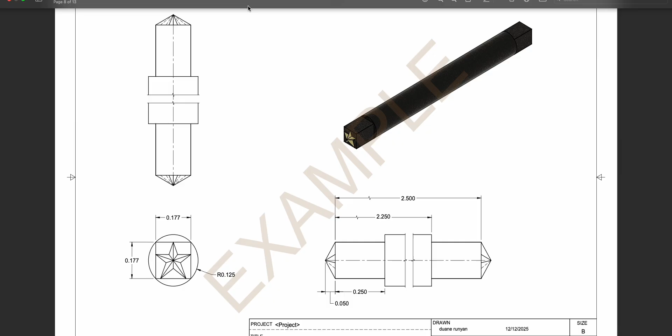All right, so I'll go ahead and drop out of this view and open up our fresh document for Fusion. Just like before, we're going to make sure this is in our folder. As you can see, we've done all these parts so far. And we're just going to now create the sketch from the front view.

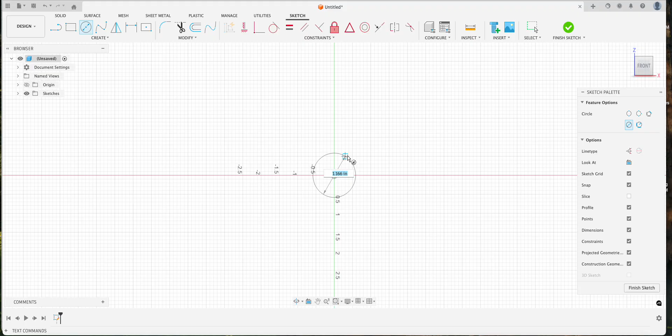And we'll start with the diameter of 0.25. I know that's really tiny, we'll make it bigger so you can see it. Go ahead and finish the sketch. Click on home view so we can see it work. Do extrude to 1 inch.

Okay, now we need to draw a box from this face. So we'll go ahead and do create sketch. Be sure to choose this edge or this face, not the axis. Do you see based on the shading where that is? We just need to make sure that we click over here on the circle, not on this square.

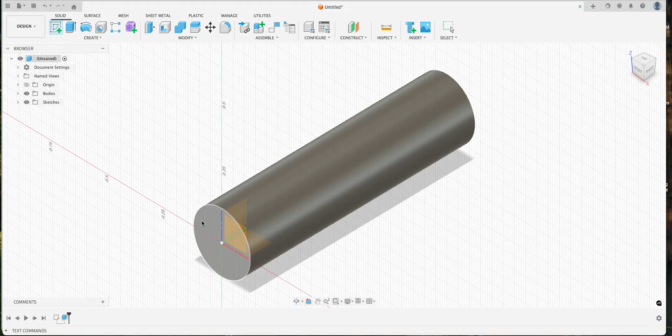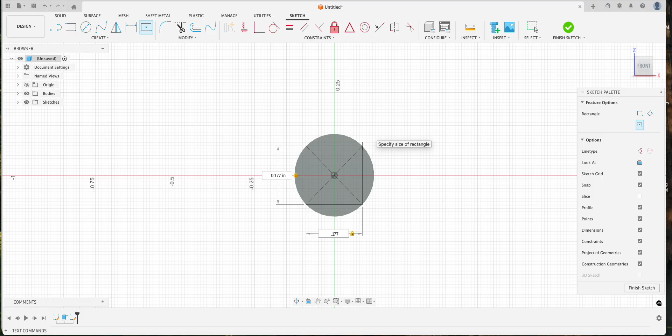Excellent. Now you may not have the center rectangle showing on your menu, so if you click on the menu title, create, come to rectangle, choose center rectangle. Then we'll click on the middle here and just move the mouse. I'm not dragging it, this is just moving it in the right direction. And then we'll type in the keyboard 0.177 in both fields. So we use tab to move to the next field, 0.177. You won't be able to just drag and get it exactly right, so you've got to type these in.

All right, now we'll go ahead and finish this sketch and we'll extrude this square out a 1/4 inch, that's 0.25.

All right, now we're going to put the star on the face here. Just a word about the star real quick. I have a 5-pointed star, that's the one I'll show you how to do. You are welcome to do something larger, or like a 6-pointed star. That would actually be a smoother star if the train was rolling down the track. It's your choice, you do need to do some feature that's extruded on this piece though.

All right, here we go. We'll go ahead and do the create sketch. We're going to use this face right here.

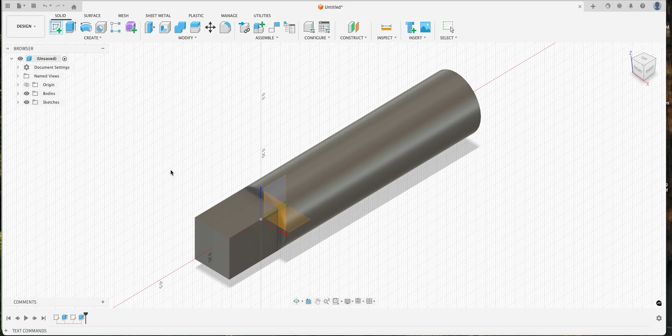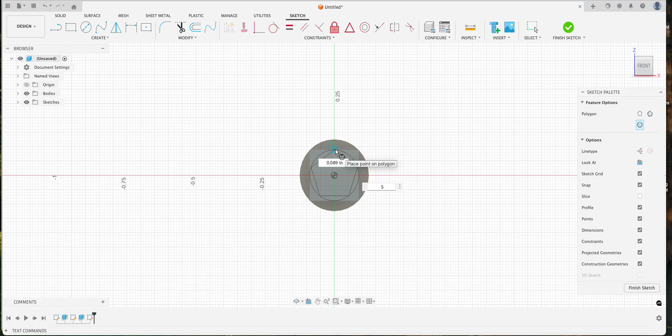Okay, and under create, there's one that's called polygon. Use the one that says inscribed polygon. This means that it will be inside of a circle. So we choose the center origin here like this, and you notice that right now it's a 6-pointed star. If we wanted to, we could just go up here and just make sure that all points of the star are inside of the box. But I want to do a 5-pointed, so I push tab, choose 5, and then I'm going to adjust this so that it fills the box the best I can without it going outside of the square. It looks like the top will be just fine.

Okay, now let's zoom in a little bit, and using the line tool, remember we can push L on the keyboard, and we're going to draw lines from each vertex into the center, and we'll also draw to each point, so each point should have 3 lines coming to it. Let's see, that one didn't work. Let's do, oh yes, this one here. So each point should have 3 coming to it.

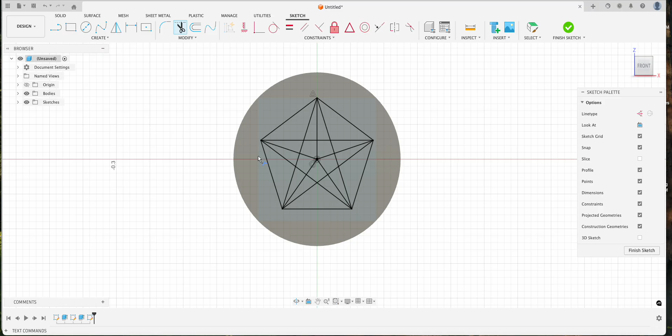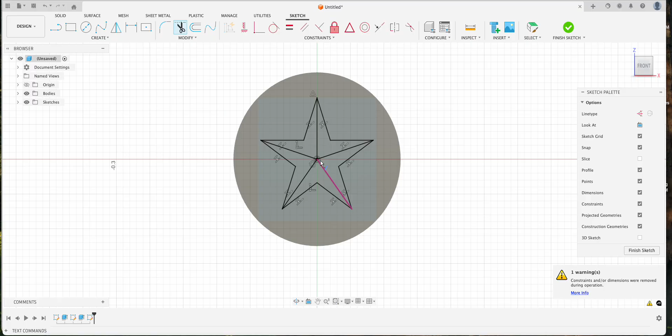Excellent. Now using the trim tool, we'll go ahead and get rid of the outside shape. And then we're going to clean up these on the inside so we only have the lines that go to the center. Oops, I did too much here, so I'm going to undo a little bit. I got one too far. There we go. Just those. Okay, so we have this space here.

You know what, we're going to try something different. If it doesn't work, then I'm just going to erase it. So we're just going to erase everything in the middle, so we have the outside. I want to try this and see if it works. I think it will. Okay, so we'll go ahead and finish the sketch.

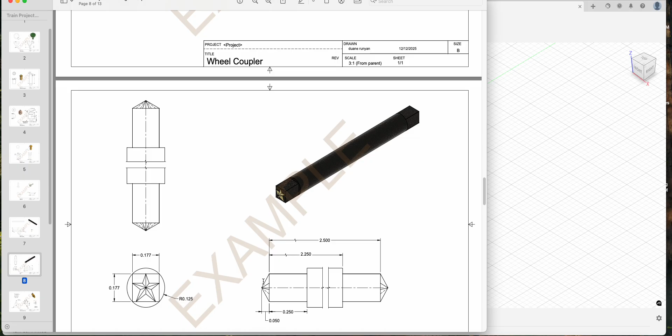And now we need to have the star from our plan. Looks like it comes out 50 thousandths of an inch. And so we need to construct a plane that's just a little bit over top of this, similar to what we haven't done that yet. So this is the first time we're doing it. This is cool. So under this menu called Construct, there's one that says Offset Plane. We want to click on this face right here, and we want to offset it by 0.05.

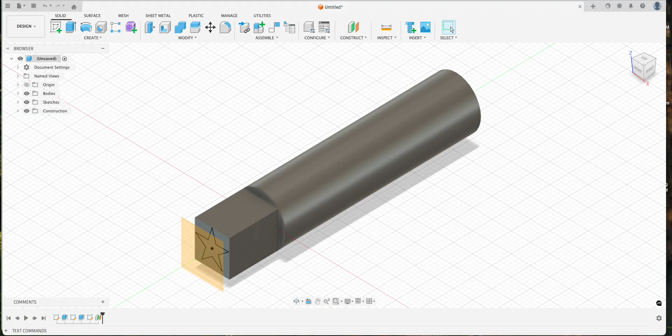Now we're going to draw on that plane we just constructed. I want to select the plane we just made. Under Create, there's one we've been using a little bit, called Point. We're going to place a point directly over the origin.

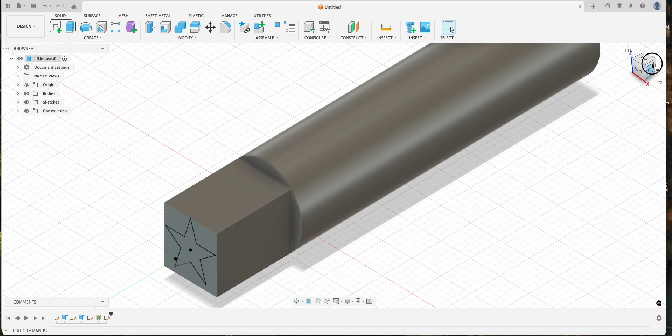Then finish the sketch. Now, as you can see, when we drag this around, we can see that it's hovering over top. I want to be in a spot where I can see it.

Now, this cool tool under Create is called Loft. What we'll do is choose the bottom part and then the top part. So we're going to loft it from the star to the point. Then click OK, and you'll see that it made a really cool star.

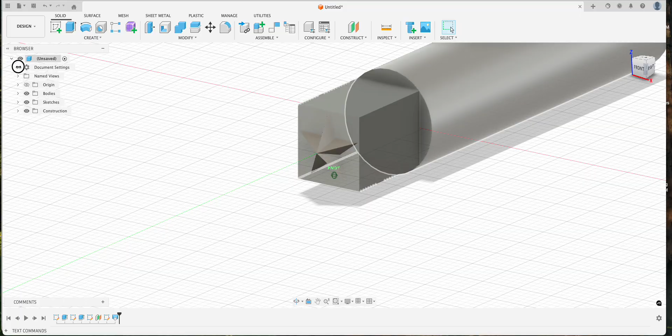Now, one thing we need to notice, I'm going to double click back on history. Do you see where it says join? If I leave it alone, then if I come back to try and do the sample where I have a gold star on a black axle, it makes it a little bit more challenging. So right now, if I make this a new body instead, it doesn't look like it really changed anything.

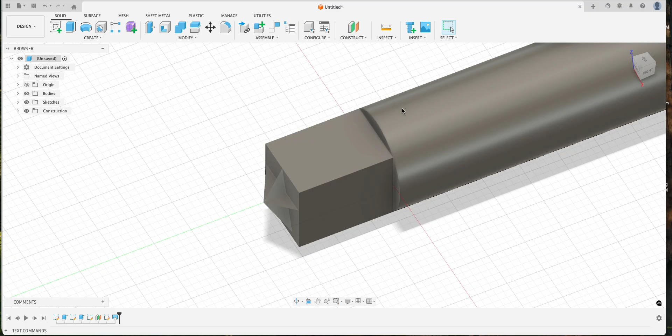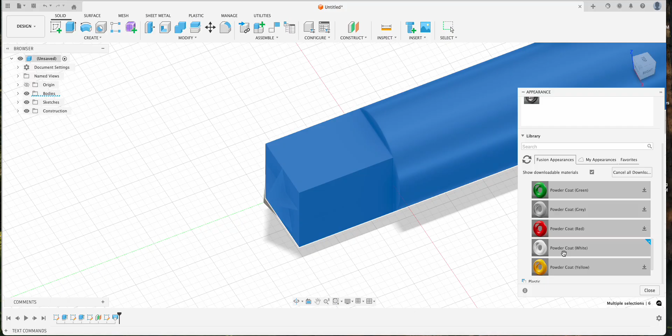But when we add color, I'm going to add color to the axle, choosing appearance. For my purpose here, I think I'll do a powder coat white. Oh, I haven't downloaded it yet. And then I'm going to make the star a powder coat black, like this.

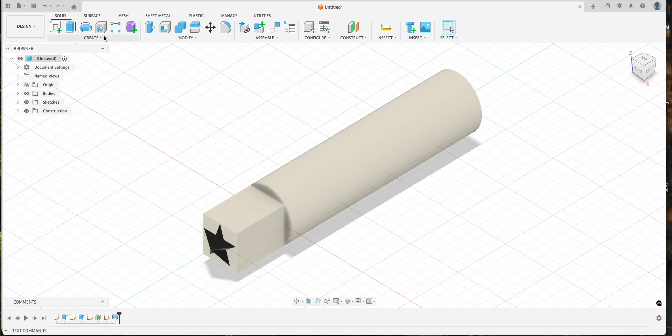Now, as we work through it, we've got this shape here. It's half of the axle. We're going to quickly make the other half by choosing Create, we'll be doing it again later, I've done so many.

Click on Mirror, and we want to choose all of the bodies, so this part and the star here. Now we're going to click on Select Mirror Plane, come to the other side like this, and click on the other part of the axle.

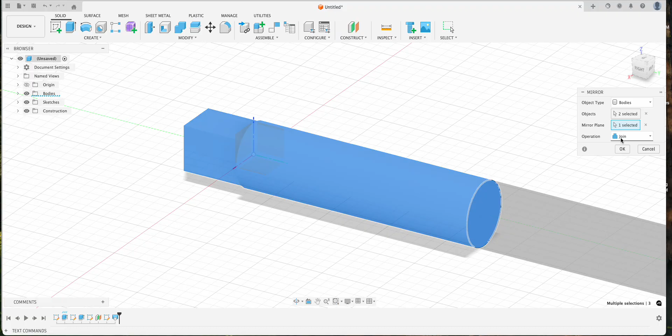This time we do want to join it. We want it to make it one piece. And there we have it.

Okay, we'll go ahead and save this thing. This is part number 08, and this is the axle. I'm just putting winter 26.

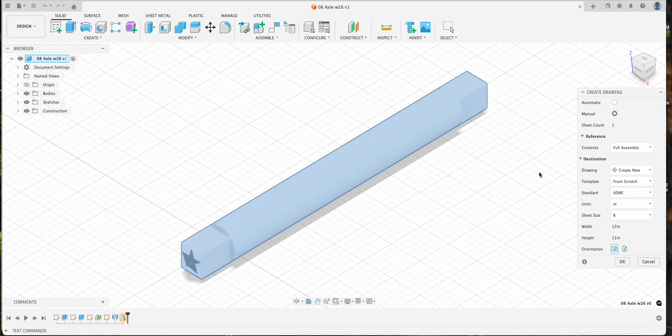Okay, so for the multi-view drawing, again, we'll use our title block. It's kind of hard to show detail on this one and have it really show anything, so I'm going to make it larger. I'm going to go like 3 times larger, maybe 4 times larger.

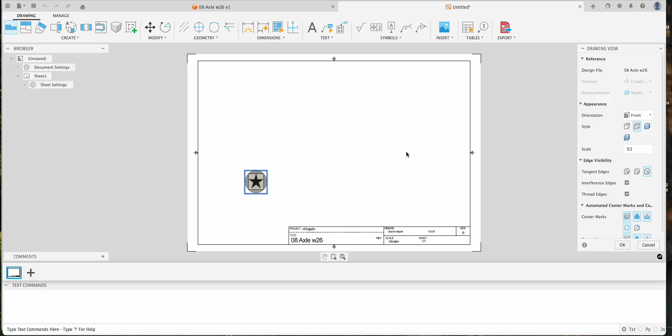There we go, that looks pretty good. I could probably even do maybe 5 times larger. There we go, okay, so I did 5 times larger. The problem is when I do the projected view, it's so big that it kind of fills the space, but I want it that large so that it gives me the details so that I can draw these real well.

So now we've shown you this before. Under Edit View, we can change the scale of this one, and that doesn't matter to me too much, and we want to make it solid. The reason why it doesn't matter to me on the model view is because we're not going to measure from the model view to find out how big the piece is. But on the others, we need it to scale.

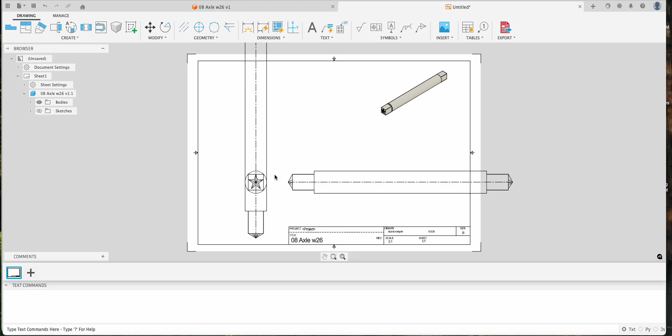And we'll have to make sure we change this back where it says 5:1 scale. Just make sure that sticks right.

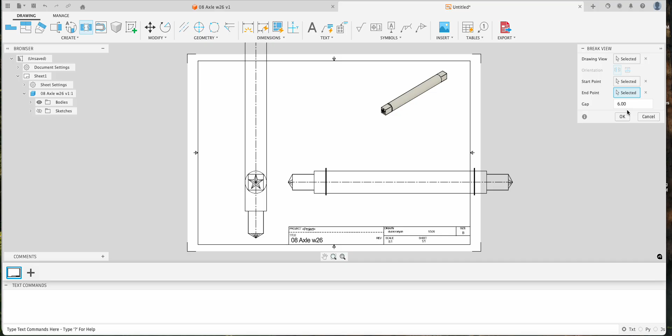Okay, now here's what we're going to use, it's called a break view. So we're going to click on this shape. This is really approximation, I just want to go so it's fairly similar, both sides like this. And it looks like my gap is going to be fairly small. I've selected everything here, click OK, and it makes it smaller.

You see, so that I can see the whole shape. And if we look a little closer, we can see these little break views that show that this thing has been broken, and it just continues on. So it allows us to do larger shapes in smaller space.

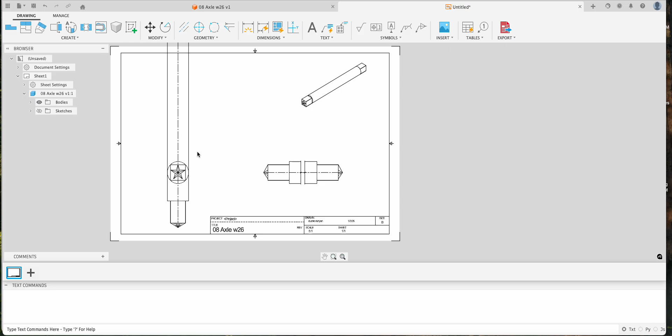We'll do this one too, do a break view here. Choose this shape, go about here. I'm going to have to scroll way up here, find it. That's good, like that, click OK. And now I can move it up out of the way.

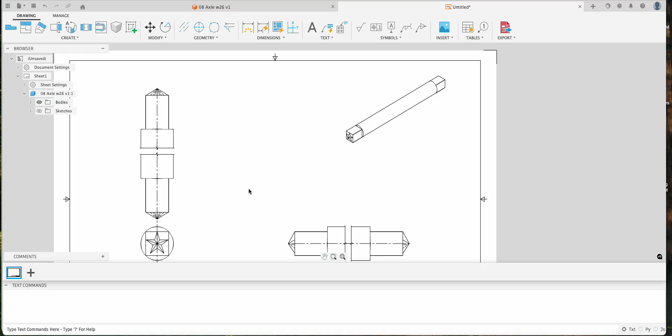I don't know why that's doing that, but go ahead and get rid of the center line. That's fine, okay, and so now we have it, it's all lined out. And then we can do the dimensions.

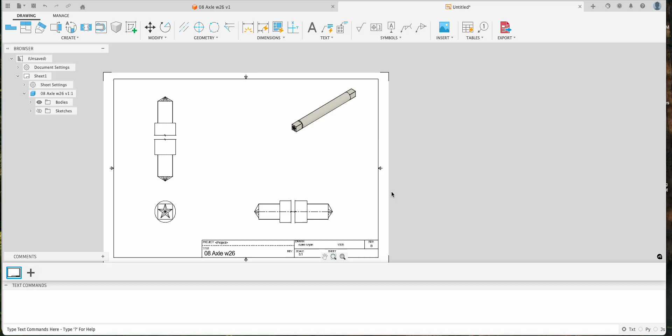So as you prepare the dimensions for this part, make sure you give me at least as detailed of dimensions as I have shown you in the example. Okay, that should be it. Enjoy your work.